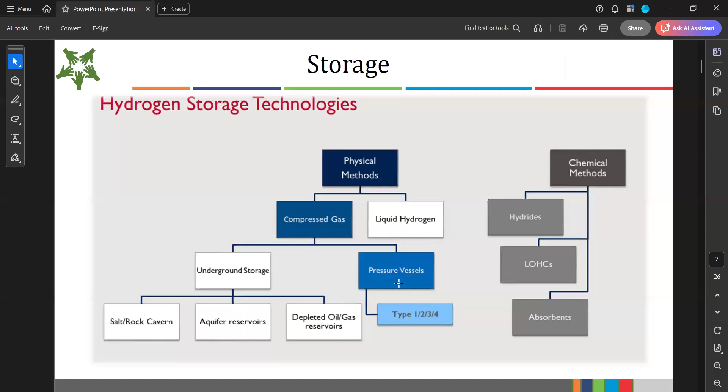Now we get into the verticals of hydrogen and its storage. Before talking about production, we need to talk about how hydrogen storage plays a very important role and what the physical challenges are. You can see a wide classification of methods that we can have. Presently, hydrogen is stored in pressure vessels, type 1, 2, 3 and 4. There are four types of pressure vessels where we can have the hydrogen compressed.

Basically, hydrogen has a low volumetric energy density and is the lightest of all the elements, so it's very difficult to store in a compartment. It's lighter than helium and easily lost into the atmosphere. That's one bigger challenge. Also its boiling point is low, minus 252 degrees Celsius, so it has to be kept at a very low temperature, the cryogenic way. Storing hydrogen as a gas requires high pressure tanks, basically 350 to 700 bar pressure.

And why is storage of hydrogen critical? Because with hydrogen there are a lot of applications you can utilize in the upcoming days by incorporating it with a fuel cell, and the usage of hydrogen in various technologies. It is going to make the process much more clean and green, with less pollution, and more efficient. Hydrogen cooling is already in place and works very efficiently. And leak detection in hydrogen systems is another challenge, which is why hydrogen technology is still far from what we think. So let's get into more detail.

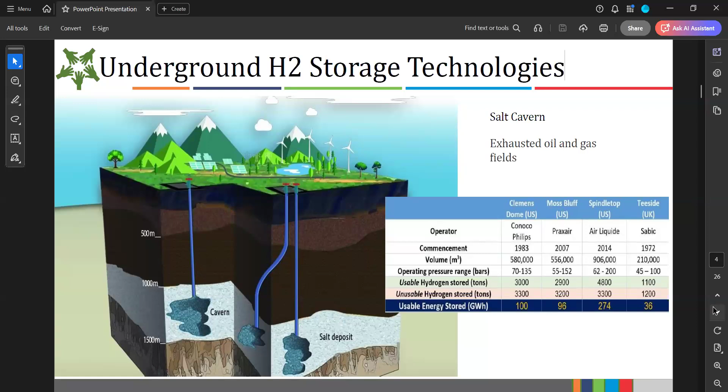As I told, there are four types of hydrogen storage: type 1, type 2, type 3 and type 4. If you see the pressures of hydrogen storage in detail, type 1 is 200 bar, type 2 is 300 bar, then type 3 and type 4. A type 4 tank can have up to 1000 bar pressure. There are different lining materials inside.

I'm getting cross noise from participants, kindly mute your mic, please. Sorry for the disturbance, sir.

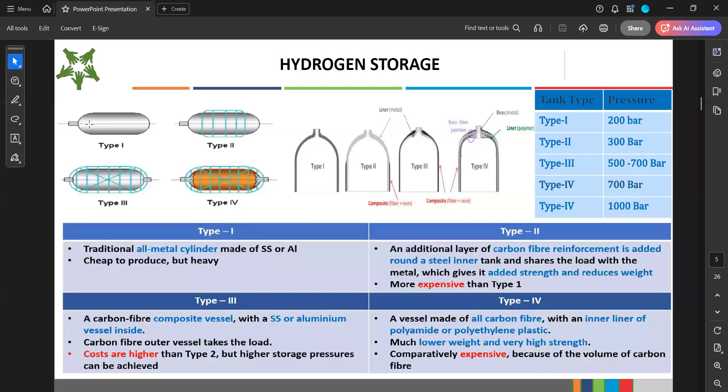No problem. The type 4 vessel can have high pressure hydrogen storage, and it's made of carbon fiber with an inner liner of polyamide and polyethylene plastic. It's lightweight with very high strength, but it's expensive. Let's get into more detail about the Type 4 vessel. This is the setup of a Type 4 vessel using carbon fiber composite: there is dome protection, a valve, an inner liner, and a temperature sensor inside.

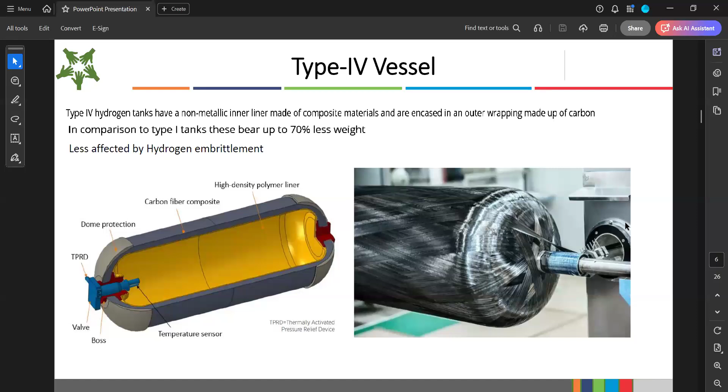The point is, unless the hydrogen storage technology is fully developed and implemented, this technology is very challenging, risky and complicated to deal with. That's why hydrogen storage plays an important role when we talk about green hydrogen technology and its usage. These are different types of cylinder testing processes involved in hydrogen storage. Anyway, the presentation will be shared, so you get to know all about it.

It includes what type of resin material and plastic liners are used, then the hydrostatic burst pressure test, ambient pressure test, leak test, bonfire test, penetration test, chemical exposure test, damage test, then torque test. All the tests are done before it gets deployed.

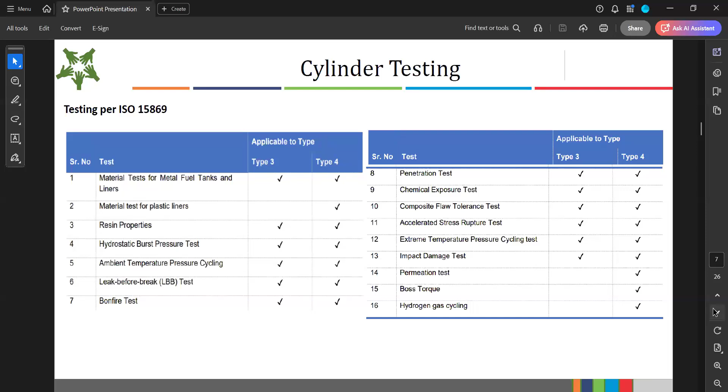Transportation of hydrogen is a very critical point, because usually petrol, diesel and crude can be easily transferred from one point to another with heavy containers. Petrol, of course, will evaporate easily, but it's not that complicated in terms of safety. Diesel is not much to worry about, as well as crude.

But hydrogen transportation is looked upon very keenly, because there are two stages: one is physical storage, and the other is chemical storage. In physical storage, it gets compressed and stored. In chemical storage, it is transformed into different forms and stored.

So the mode of transportation: it can be taken in trucks, rails, pipelines, and shipping, and the travel distance is also defined, so you cannot go more than that. If you want to go for a larger distance, then only you can go for shipping, because making the hydrogen travel by ship involves much more complexity, since the ship will have a lot of shakes in the journey and that makes a higher possibility of hydrogen getting leaked.

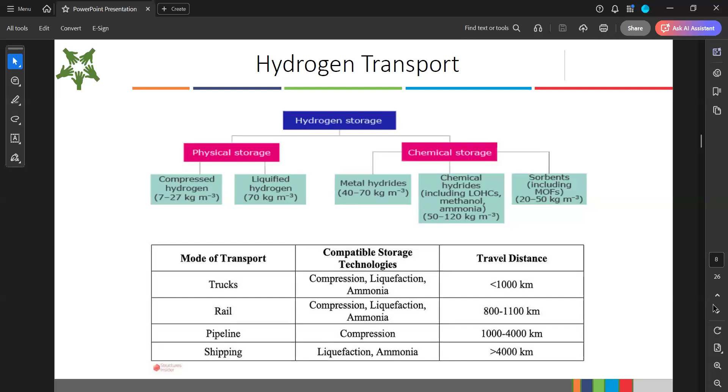So basically the hydrogen was transported from Australia to Japan. The moment the container reached Japan, when they opened it, there was nothing inside because all the hydrogen got leaked. It's very difficult to store hydrogen, so those kinds of serious issues are there in terms of storing it. And it's given here how the hydrogen can be stored and what kind of energy density we can have, with respect to compressed, liquid, and other forms like metal hydrides and sorbents.

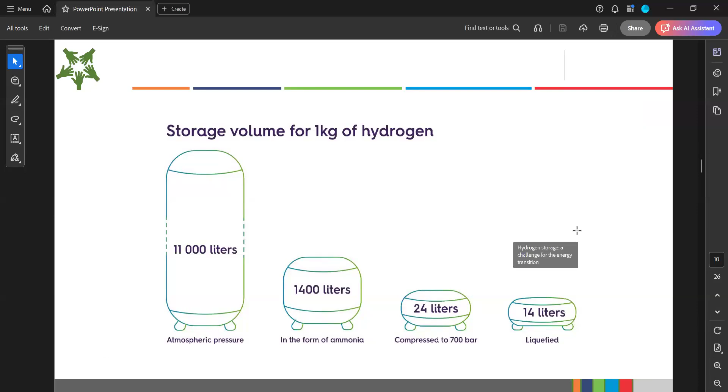So this is the storage volume of hydrogen in terms of the tanks: 11,000 liters, 1,400 liters, 24 liters, 14 liters. So 14 liters is the liquefied form. Shipping of hydrogen from one point to another involves a lot of logistics and transportation. Liquid hydrogen or ammonia is normally transported in ships due to their high energy density, with high cost due to the conversion charges.

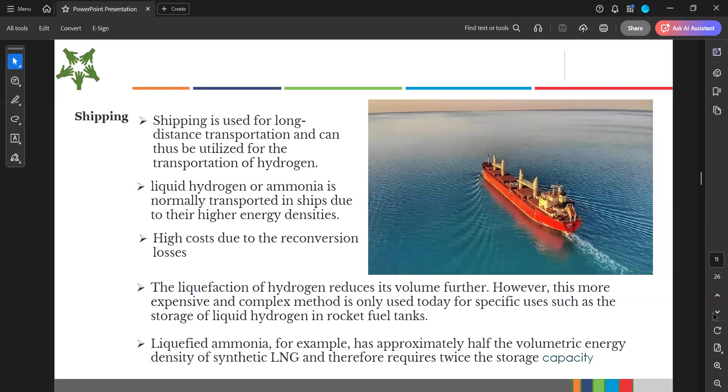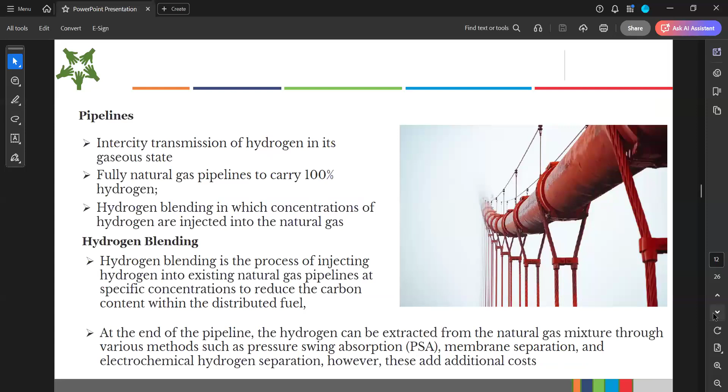Because once you change the form from one to another, you have to convert it back to hydrogen again. So ultimately it is all going to increase the cost. Transportation of hydrogen through pipelines is another way, and blending hydrogen into natural gas pipelines is another way. Ultimately, everything involves a process, so look at how much electricity it is going to consume. Now we're coming to the main subject, the components of the system involved.

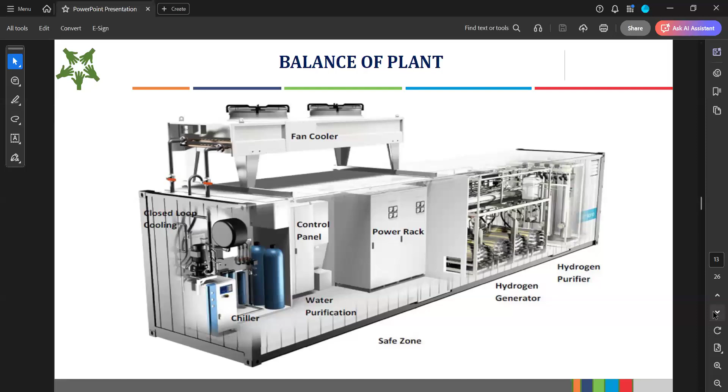So this is the closed loop cooling plant and control panel, water purification, fan cooler, power rack, safe zone. This is the hydrogen generator and this is the hydrogen purifier. So this is the total system involved. This is a generic schematic and balance of plant for PEM. This is the transformer where the supply comes in and it gets converted into DC through a rectifier. So this is the input supply for the electrolyzer.

So basically the input, the fuel for this whole process, is water. Water is fed into the electrolyzer, and the supply is given to the electrolyzer through the rectifier because DC power is required for the electrolyzer to work. The electrolyzer separates H2O, water, into two separate components: one is hydrogen, H2, the other is O2. So you can see here, oxygen is separated and hydrogen is separated.

Oxygen is taken out through the vented oxygen point, whereas hydrogen is sent to two chambers to separate the water from the gas and dry it, so that it will be dry hydrogen. After that it is sent to the buffer tank, compressed further in a high pressure compressor, and finally it comes to the storage tank where it is stored. The water is collected in the electrolyte tank as the byproduct of this whole process. So this is the total schematic layout of the hydrogen production process.

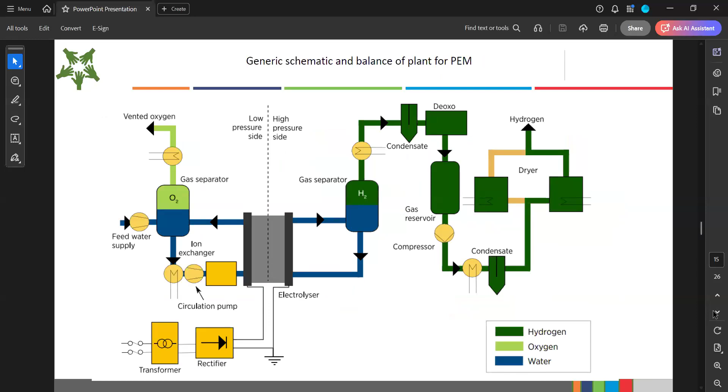Right. So the hydrogen generation stages can be classified. First, the transformer rectifier unit. This is the electrical unit which is mainly there in front of the electrolyzer, because this converts the existing alternating current into DC. Okay. So DC power is required, and the DC power will power the electrolyzer.

Okay. So basically the anode and cathode of the electrolyzer are connected with the positive and negative terminals of the rectifier output. Whereas the electrolyte system will consist of two gas separators and an electrolyte recirculation system, and it is cooled and recycled into the stack. So the main function is to feed the water tank, cool down the H2, and remove the residual electrolyte traces. So these are the pre-hydrogen generation stages.

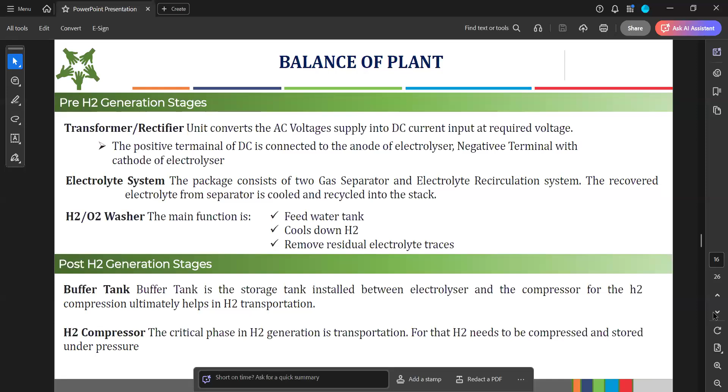The post-hydrogen generation stage is the buffer tank, where you collect the hydrogen, get it dried, compress it and make it ready for transportation. Okay, so that's the H2 compressor, where it will compress and store it in category 1, 2, 3, 4 tanks based on the nature of transportation. And once it is stored, then it is taken for further level of transportation.

And there are other components like the deoxidizer. So that is to remove the other suspended molecules in it. Then the hydrogen dryer unit to remove the water vapor and moisture in the hydrogen gas, and storage of hydrogen.

And there is another unit called the water purification unit, where the pure water which is coming out as the byproduct will be taken out, and we have to remove the contamination of the recycled water to protect the electrolyzer stack, because through the process it will go through different pipes and come out. So there might be some microparticles of ion, metal, and other things. So that has to be removed effectively.

Otherwise, the problem is the electrolyzers have a membrane. Okay, so the membrane is something which separates. So the membrane is very sensitive, and that's the heart of the system. Like how our heart has auricles and ventricles. Similarly, here the main unit which works for the whole system is the electrolyzer membrane. So the main purpose of filtering and purifying the water is to increase the longevity of the electrolyzer.

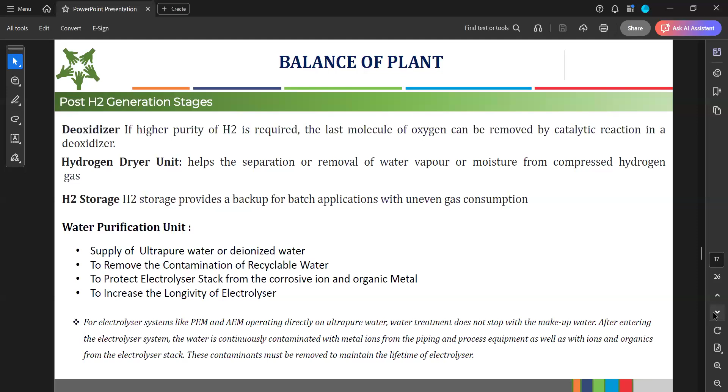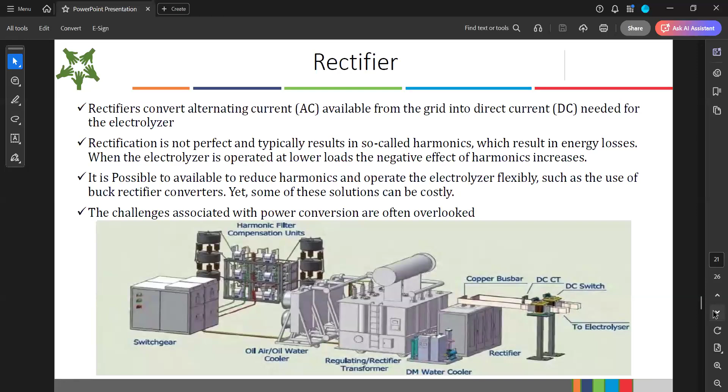Here you can see the switchgear, and there will be a harmonic filter and compensation units to reduce harmonics and make the system harmonic free. The total harmonic distortion should not be more than 1% for the total system, making sure the power factor is maintained at unity and harmonics are completely eliminated.

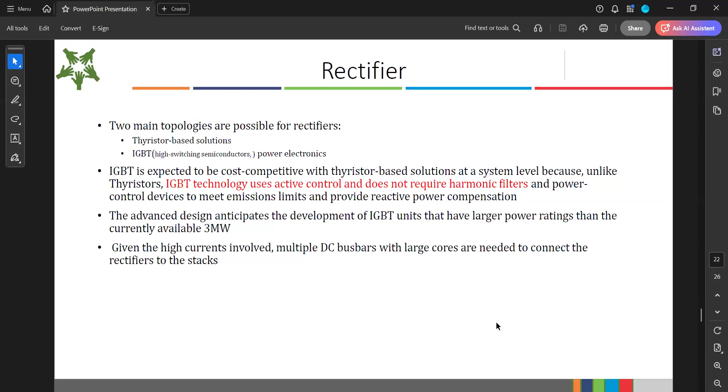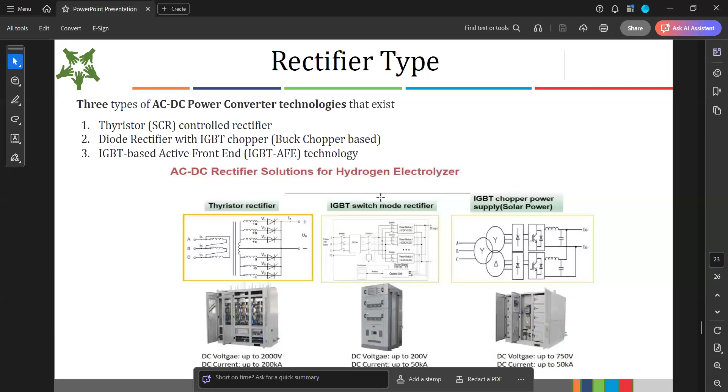These are the different types of rectifiers used in the process of hydrogen production: thyristor rectifier, IGBT, and chopper power rectifier.

Now I want to take you to the real subject of how solar is going to be implemented and how it's going to be beneficial for you—the hydrogen energy system. We see hydrogen can be used; I'm coming to the point of application of hydrogen, and now we shift to how to integrate solar into hydrogen. Before that, think about the necessity of generating hydrogen, because it has multiple advantages and applications.

These range from transportation, creation of synthetic fuels, fertilizers, metal production processes, and power generation.

So many ways, including power generation by integrating with solar, it works very efficiently. I'm sure we all know about a few technologies like Bloom box and hydrogen fuel cells at the advanced level, where I read an article where a 100-watt solar panel with a small fuel cell can generate power for a typical 2 BHK house for 10 years.

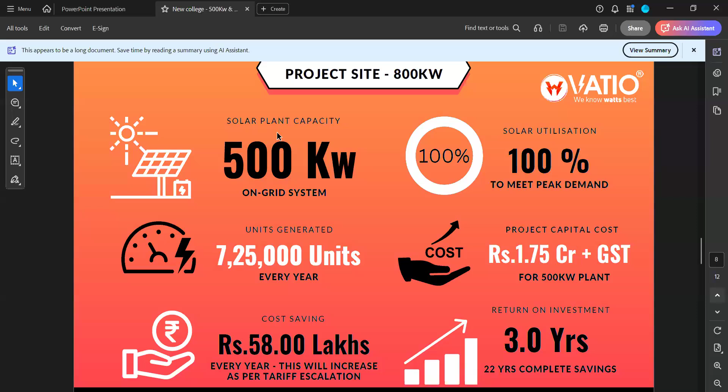So I hope you can see the screen. Yes sir, it's visible, sir.

So this is the simple nutshell of a 500 kilowatt on-grid system. In case the production site requires a system of 500 kilowatt to be powered by solar, then it's going to cost an additional 1.75 crore in capital cost.

But if you see the math down the line, the return on investment is just 3 years, which works out to around 30 to 33% rate of return year on year, which you can never witness in any other form of investment. So the ideology of bringing solar into green hydrogen production is a very fundamental need of the hour.

Not just to claim it is green, it's also to make it much more cost effective, because the moment you bring solar into the system, the first 3 years is going to be your expenditure. From the fourth year onwards, the cost of production is going to come down because the cost of electricity year on year is going to be saved.

Every year, 58 lakhs is going to be the savings, and translating the amount of energy produced in 1 year of time, if you subtract that amount, it's going to bring down the cost of hydrogen production significantly.

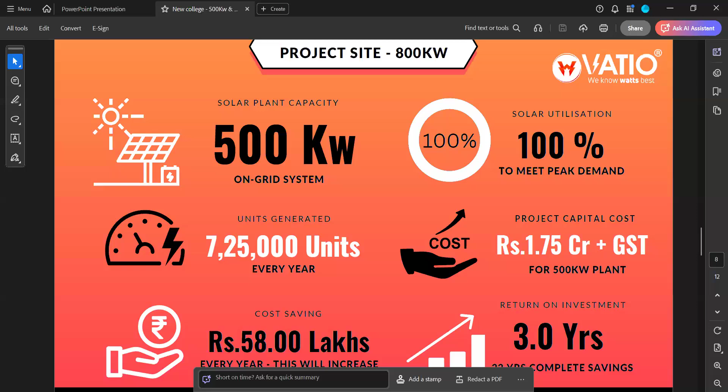So before that, in detail about how solar can be adopted, we need to look at what type of system is involved, how much energy it can perform, and what kind of environmental benefits it will help with. So let us go into that.

Sir, your screen is not visible, sir. Rajaganesan, sir.

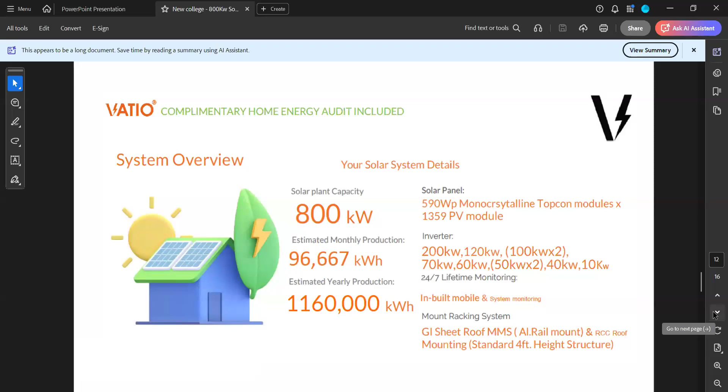So in case if you are planning to put an 800 kilowatt system for green hydrogen production, what are the kind of environmental benefits we can see here? Installing an 800 kilowatt system is literally equal to planting 16,000 trees per year, and also about 20.8 lakh liters of water is saved every year.

Also 5.2 lakh kilograms of carbon emissions is prevented every year. Approximately 522 tons of carbon emission has been saved, and approximately 580 tons of coal is being saved every year, and also 130 kiloliters of gasoline is also saved. So ultimately that's why we are referring to generating power through solar as green power, because of this kind of environmental impact.

Because if you go with the thermal power plant, you need coal, lignite, and that's a byproduct extracted from under the ground. That's nothing but fossil fuel. Once upon a time there were trees that went into the earth and became coal, further converted into lignite. That's the whole story we all know.

But the point is, the more we deplete the resources, the more the resources will get in deficit. And if you see in Neyveli, we have a lot of mines. We took a lot of lignite, and after it's all closed, even if you do the plantation, how long is it going to take for that particular area to get regenerated? That's a big question.

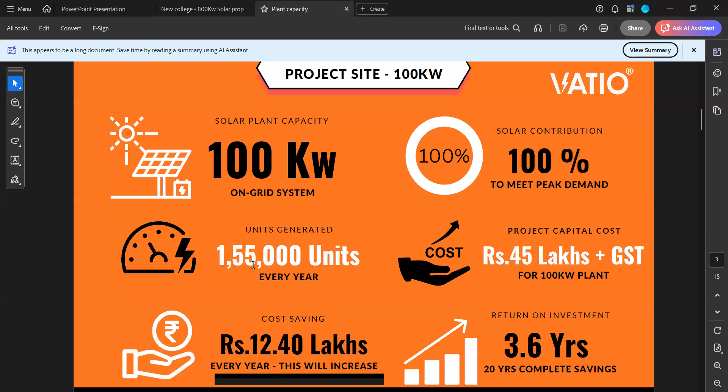So let us take a 100 kilowatt system as a case study for your quick understanding. 100 kilowatt will generate approximately 1,55,000 electricity units every year, and the cost savings is going to be approximately 12.4 lakh rupees. Whatever power is generated during the daytime, we can utilize that 100%. And the lifetime of the plant is operated for 20 to 25 years.

Now let us dive much more into the technical aspects of a 100 kilowatt system. Usually for solar power plant, what we put is an on-grid system for this kind of application. Either it can be a captive plant - captive plant is something which is put on the premises itself, so whatever power is generated on the rooftop will be utilized on the building itself for the factory or industry, consumed during the daytime itself.

In case if their consumption is less, then the surplus energy has a possibility of getting exported into the grid. That is called feed-in. So there are two or three different methods available in India per se - one is net metering, other is net feed-in, third is gross metering.

Net metering is adjustment of units by units, for residential systems it is there. So if you export 10 units in the day, you can adjust the same 10 units at night time for your AC consumption. But that's not possible in an industry or commercial establishment, where they are forced to adjust only during the time of the day. That's what we call TOD.

So whatever power is produced during the daytime, at the same time that power needs to be consumed. So the plant has to be designed in such a way that whatever power is produced from the solar should be utilized optimally, on the maximum, during the daytime itself during the load time. So understanding the load scenario is very, very important. That's why when we go for the installation of solar for any factory, industry, or process industries, understanding the load curve is very, very important.

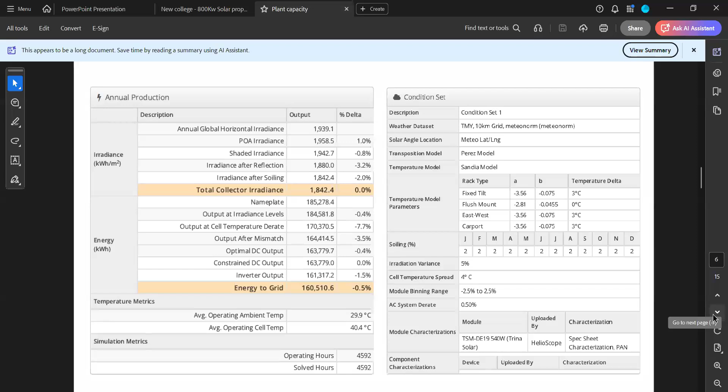So ultimately, in spite of the reduction of panel performance over the years, the cost of electricity is also going to increase year on year. In Tamil Nadu, the electricity prices are increasing by 4 to 7%, whereas the efficiency drop is only 1%. Still, you save 5% of the electricity hike year on year if you go with solar. If somebody installs solar today, he is going to effectively get his return in 3 years. Subsequently, the electricity price is also going to go up, which makes his return much faster than what has been predicted.

So, how can the evaluation of a site be done? Basically, for the rooftops we plan, we first have to do rooftop solar array feasibility studies, because we need to know where the shadows will come, how much they will impact, and all the factors we need to analyze. That's why the analysis of the array and its shadow impacts needs to be done. We can also mention where the inverter will be placed and how far it's going to be.

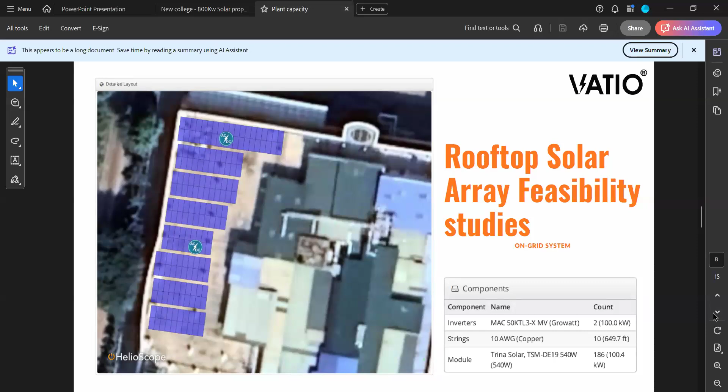And the solar panel shadow simulation study is also important, because the sun is not at the same place throughout the year. It is going to shift for different seasons, various climatic conditions, and also for different times. From morning to evening, the sun travels from east to west, whereas for different climate conditions, the sun moves from north to south.

Just the objects or disturbances which are on the left side or right side, which means east side or west side of your panel, will have a higher possibility of creating shadow. Whereas the objects which are on the south side of your panel installation area will have higher possibilities of creating shadows during the winter seasons. So you can't wait for 365 days to analyze how the shadow behaves in that area. So that's where the simulation studies play an important role.

So by choosing the location, automatically the latitude and longitude of the particular location will be fetched, and accordingly the sun path will be taken for reference, and that sun path will clearly tell you where the sun will be at a particular time, particular day, particular month. Okay, so based on that we are able to estimate where exactly the shadow will fall.

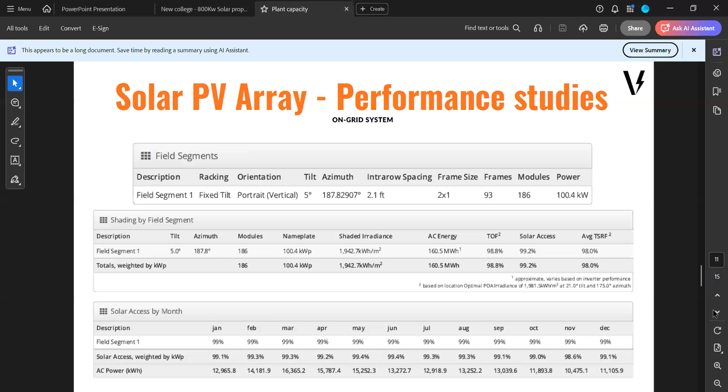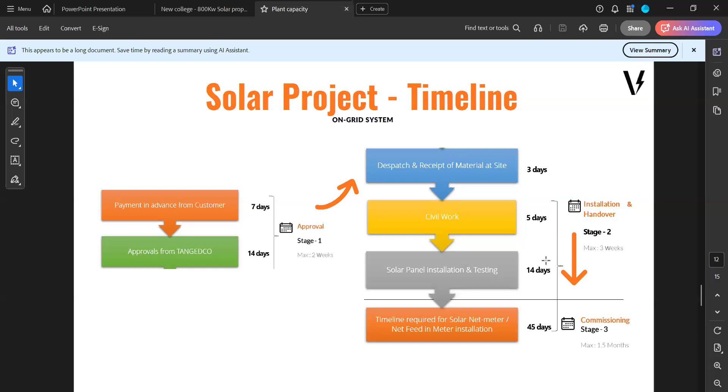So the project timeline will vary according to the project, right? From the customer approval, then getting the approvals from TANGEDCO or whatever the discoms, then material dispatch, civil works, panel installation, then getting the approvals for the meter, net feeding mechanism, and all the other factors.

So now I just want to throw a quick question: you are all from the academic background, so how many of your institutions have solar installed at your campus?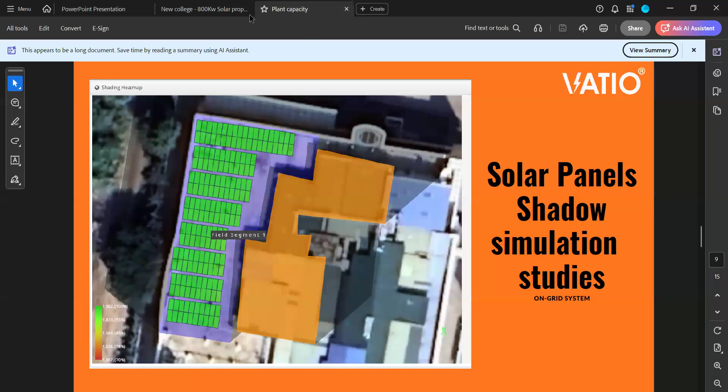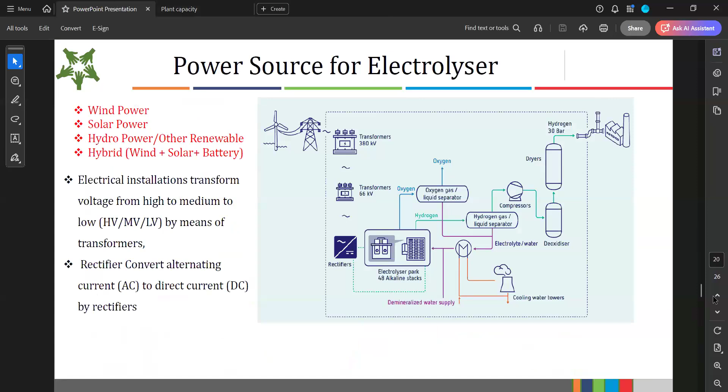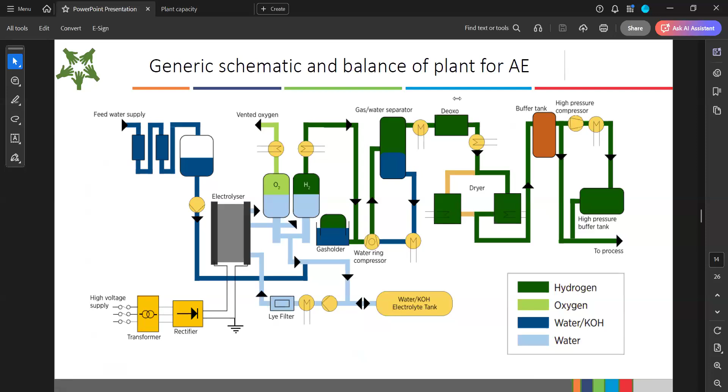So now there'll be a question of where this solar, whatever we are discussing, will be connected. So basically, the solar will be connected here. I'll show you. So this is your main transformer and this is your rectifier. So basically, it is going to be connected in between. So let me put up a whiteboard to make you understand very clearly.

Can you able to see the white screen? Yes, sir. Yes, sir. It is visible, sir.

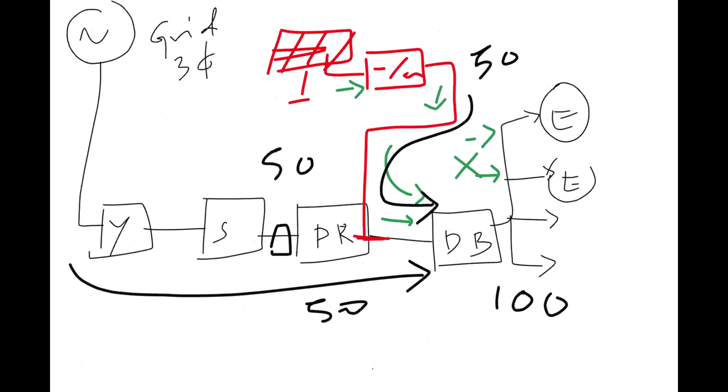So in case our day demand is more, then definitely it's not only for integrating renewables into green hydrogen production. It is for each and everybody, irrespective. It can be a college, it can be an office or factory. Whoever is operating during the daytime, it is better to put solar, no doubt about it. So, any doubts in this methodology of how the system works?

No, sir. Yeah, so I got a question in the chat from Dr. A.S. Vinci. So I would like to answer this question.

Is it a good idea to install solar for home usage, as the power usage is minimum during daytime? That's why I clearly told for residential consumers, you have the possibility of net metering. So I'll explain the concept of net metering. You have a solar rooftop, it comes to the inverter, and this is your grid, this is your energy meter, and this is a distribution point, and it is coming to your load house. Okay.

Now, how net meter works is, if during the day 10 units are produced, but you have only consumption of 3 units at home because you went to the office, the surplus of 7 units will get exported to the grid. So this meter has an export credit of 7. You come in the evening, 6 or 7 o'clock, the solar is not working, and you switch on two ACs, consuming 7 units for the next 5 hours.

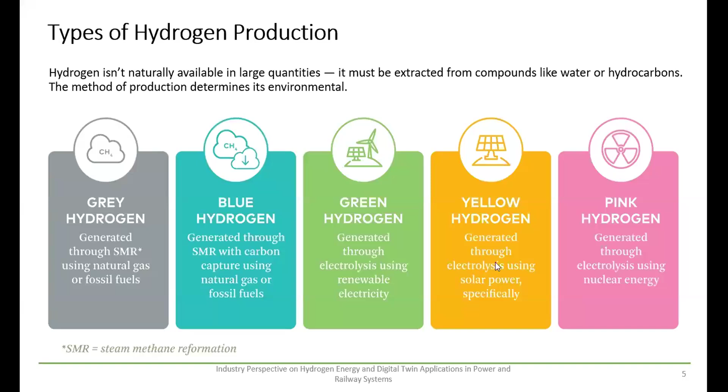And from the power sector side, or the electrical engineering point of view, we could see the electrolyzer as a large controllable DC load when connected with the power grid. The electrolyzer also acts as an interface between electricity and hydrogen.

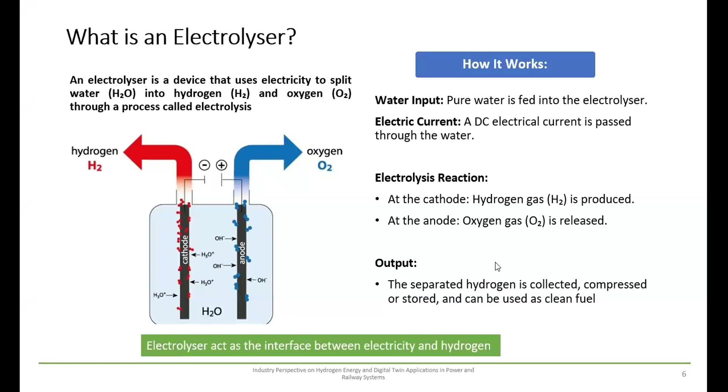power grids. And the solid oxide electrolyzer is high temperature electrolysis. Solid ceramic materials are used in this electrolyzer. It has very high efficiency, usual in industrial settings, but it is still under development. For the power sector and the railways, the PEM electrolyzer was the most suitable type.

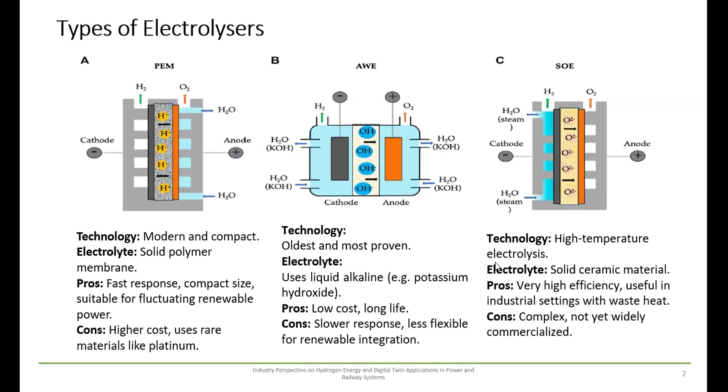Hydrogen storage and transportation. This explains how hydrogen is stored and transported, which is critical for practical hydrogen deployment. On the left, there is a flow diagram. Hydrogen storage is classified into physical based and material based. Physical based is compressed gas, cold compressed, and liquid hydrogen, which are commercially available but energy intensive. It also shows material based storage like metal hydrides and chemical carriers, which offer higher safety and density but are still emerging.

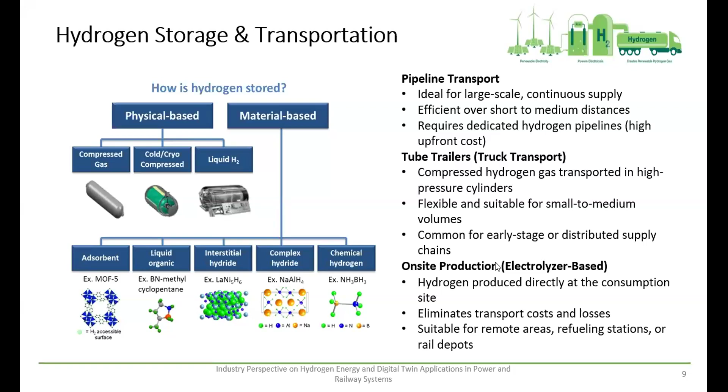Apart from transportation, hydrogen can also be produced on site, electrolyzer based. Hydrogen is produced directly at the consumption sites, so it eliminates transportation cost and losses, and it doesn't require any centralized hydrogen production.

As I told you before, the electrolyzer is a large DC controllable load. The electrolyzer is not just a hydrogen producer, but a smart and controllable electrical load. It plays a crucial role in grid stability.

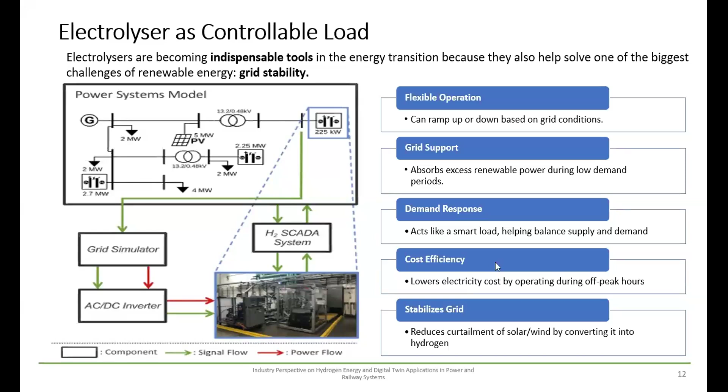From the power sector view, the PEM electrolyzer provides a sub-second response - fast response time and high efficiency at partial loads. It's compact and modular, easy to scale and deploy near renewable plants or in urban spaces. Its compatibility with power electronics and SCADA enables demand response, frequency support, and peak shaving, strengthening grid stability.

If you have any doubt, you can stop me anytime. Okay, sure sir. Okay, thank you.

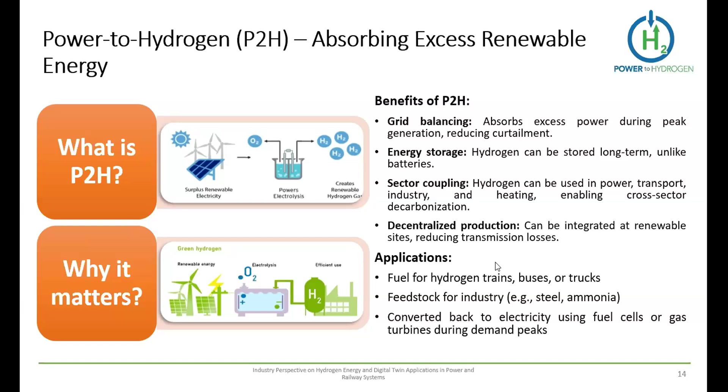Here it's hydrogen to power. As you can see in the diagram, from the electrical grid, the power goes through a dedicated transformer deployed for the electrolyzer, which steps down the voltage. There should also be a converter, though it's not included in the diagram - it converts from AC to DC and feeds the DC supply to the electrolyzer. From the electrolyzer, hydrogen is produced and stored.

From the stored hydrogen, it's used back as fuel, working as a fuel cell. From the fuel cell, we regenerate power from the hydrogen and supply it back to the grid.

A fuel cell produces electricity by combining hydrogen and oxygen - it generates power by splitting the hydrogen into protons and electrons. We normally call this hydrogen to power, H2P - it enables dispatchable generation, allowing hydrogen to act as a long duration energy storage.

It also forms a closed loop energy storage system, supporting high renewable penetration. It's a closed loop because we generate from the grid, and it goes back again to the grid - so it's a closed loop energy storage system.

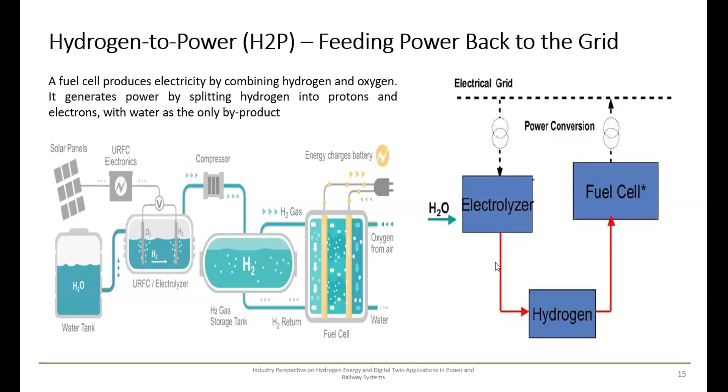The hydrogen storage, medium and long duration energy storage. Why hydrogen plays a crucial role in the medium and long duration energy storage, especially in the renewable rich power systems.

The renewable energy from wind and solar is converted into hydrogen and stored for later use in fuel cells, transportation, and industrial processes. In comparison, batteries are highly efficient for short-term energy and balancing fast responses, such as frequency regulations and ramping support.

Hydrogen, on the other hand, is better suited for large scale and long duration storage, enabling sector coupling between power, transport, and industries. This makes it particularly valuable for seasonal storage and backup power applications, including the round trip energy losses, as I told you before.

In the infrastructure and safety requirements, such as high pressure tanks and pipelines, it's a high capex. As you can see, there are a lot of complexities and challenges for storing and transporting hydrogen, compressed hydrogen.

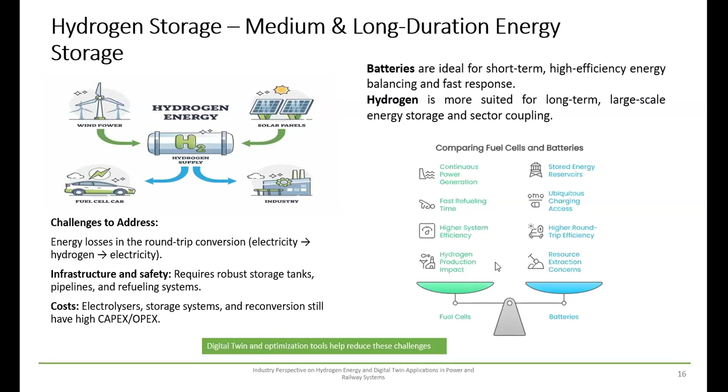And hybrid hydrogen and battery systems. As of now, we have discussed the battery and hydrogen alone systems. Now, hydrogen plus battery, we call it hybrid hydrogen.

This is important for modern power and transport applications. Batteries are highly effective for short-term fluctuations, operating from seconds to minutes, while hydrogen systems cover longer durations, from hours to days, especially during renewable energy shortfalls. Combining both improves grid stability, reliability, and asset utilization across multiple time scales.

Why hybrid? Batteries handle the short-term fluctuations, while hydrogen covers the longer duration. In practical use, batteries manage the fast power variations while hydrogen stores the excess energy for later use. This approach is very ideal for renewable energy smoothing of grid systems.

The benefits of the hybrid hydrogen and battery system all focus on grid stability. Grid stability is a very important topic in this power sector, so that's why we always talk about grid stability - improved grid stability and energy reliability, and better asset utilization across different time scales.

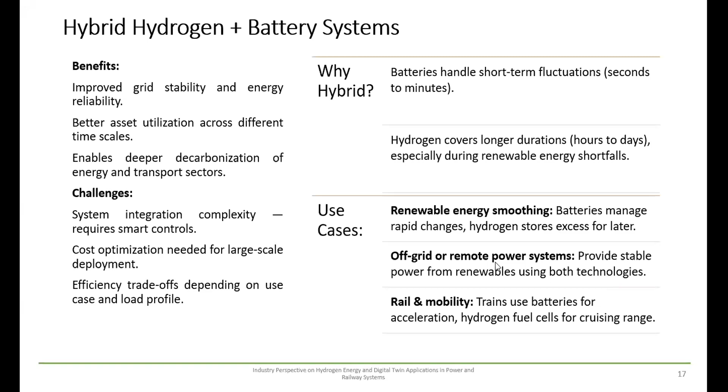During regenerative braking or surplus renewable generation - what is regenerative braking energy? The regenerative braking norm we used to call it in the railway systems. Regenerative braking is a big concept in railway systems.

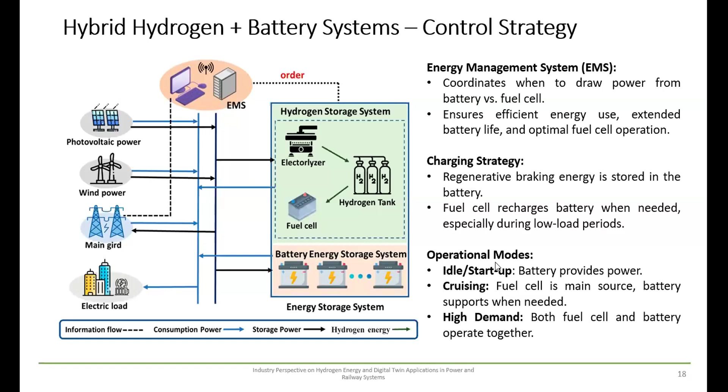Operationally, the system works in three modes for metro systems: idle or startup, where the battery supplies power to wake up the train and run it onto the track. When it starts cruising or in traction, the fuel cell is the main source and the battery supports when needed. High demand means both fuel cell and battery operate together. This is just a method of how the hybrid hydrogen and battery systems work on metro systems.

Let's come to hydrogen energy in the railway system - how hydrogen energy is being utilized in railway systems. Here's an example of a hydrogen train, showing the architecture and working principle of the hydrogen powered train, which I'll explain now.

The hydrogen storage cylinders are safely mounted on the train roof. The parts include hydrogen storage cylinders, cooling fans, compressor, and the battery or supercapacitor - normally we call it a supercapacitor. There are motor blowers and the three-phase AC motor on the bogie sides. On the power side, we have the DC link, main inverters, three-phase AC motors, and the auxiliary inverters.

The hydrogen storage cylinders are safely mounted on the train roof. Hydrogen from these tanks is supplied to the PEM fuel cell stack, where it is converted into electricity, producing only water as a byproduct. The electrical output from the fuel cell is regulated through the DC link and power electronic converters, normally called high-speed circuit breakers (HSCBs) - very high-speed operated circuit breakers. This includes the complete power module, including the inverters and rectifiers.

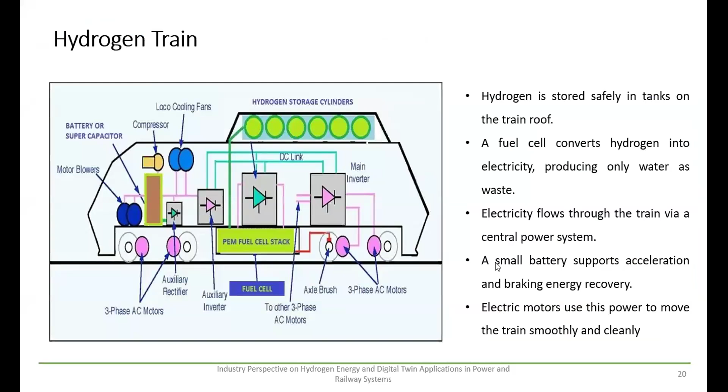And there are no emissions, it's zero emissions, only clean water vapor. There is no CO2, no NOx and no particulate pollution.

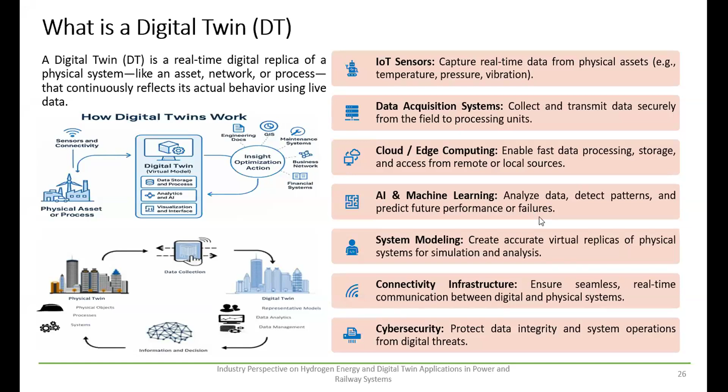As you know, for the types of digital representations, we have the digital model, digital shadow, and the digital twin. The digital model is a static model. There is no real-time data exchange. The digital shadow is a unidirectional data flow, only one-way communication, automatically from the physical to the digital. And the digital twin is bidirectional. The digital may inform or trigger changes. With real-time data, it's a closed loop control in this technology.

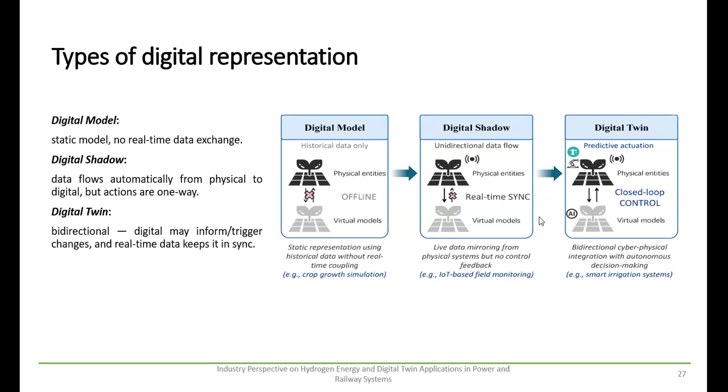Practically, digital twins allow real-time condition monitoring, early fault prediction to reduce downtime, and efficiency optimization of hydrogen production and usage. They also enable virtual simulations before construction, improving design and commissioning. Most importantly, digital twins ensure safe operations, monitoring critical parameters like leaks, pressures, and temperature issues, while enabling seamless integration of hydrogen systems with renewables and the power grid. These are the key challenges we can overcome with the digital twin platform. This makes hydrogen systems scalable and reliable.

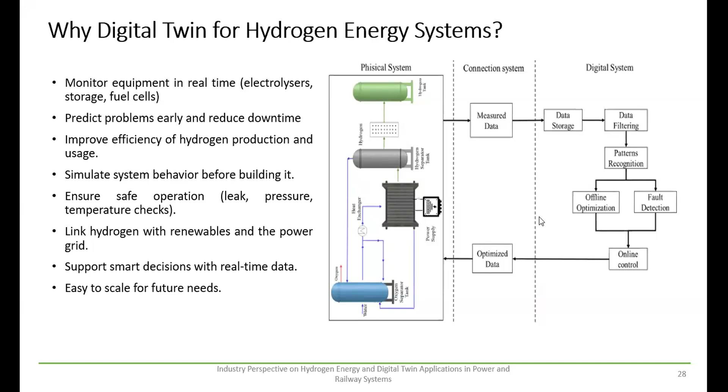Let's go to the architecture. How would the architecture be? There are a lot of layers for hydrogen energy systems. The physical layer, normally we call it the actual assets, where the electrolyzers, turbines, and the grid are all installed. We replicate the same systems in the physical layer. As I discussed before, the IoT sensors are fixed in the sensing and data acquisition layer. Then the data processing and analytics layer, where all the real-time data from the physical assets is processed.

The model and simulation layer has mechanism-based models, for example, power flow, dynamic stability, and electrochemical processes. Integration and interface layers: dashboards or user interfaces, control loops, possibly automated control and optimization actions. Life cycle modules: design, planning, operation and maintenance, real-time monitoring, predictive maintenance, or scenario analysis, such as expansion planning.

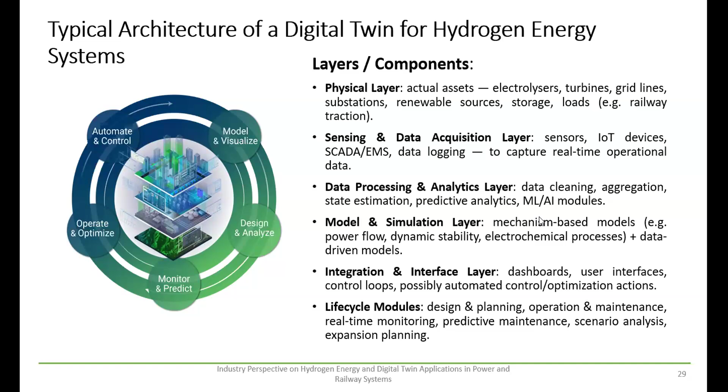Also, the need for the digital twin in TPSS. What is TPSS? It's traction power substation systems. The digital twin also helps to simulate train movement and its load. We can predict dynamic load variations as the train accelerates, cruises, and brakes, and when the train can generate regenerative energy. It also prevents substation failures. It simulates the stress on transformers, circuit breakers, and feeder lines for proactive maintenance. It can help predict voltage drops and feeder overloads, and identify weak points in the traction supply before actual failures.

In the railway sector, we have the power zone and the neutral zone to run the train. Where a power zone fails, that will be a weak point of the traction. We can predict and identify that by using the digital twin for TPSS. Optimize schedules and energy usage: analyze train timetables, regeneration, and load balancing to minimize energy consumption, and reduce downtime via predictive maintenance. Continuously monitor asset health to forecast failures and schedule maintenance.

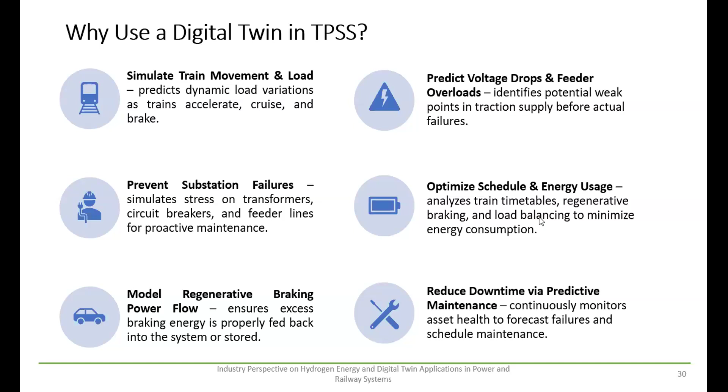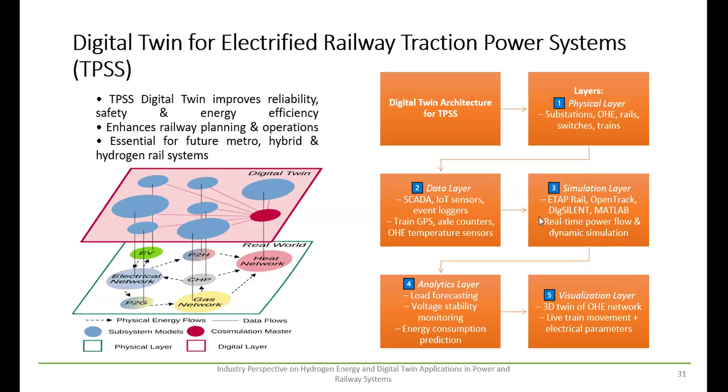The analytics layer covers load forecasting, voltage stability monitoring, and energy consumption prediction. Then visualization: we can visualize all the practical scenarios with this layer. So the TPSS digital twin improves reliability, safety, and energy efficiency.

I hope I basically covered hydrogen, how we integrated it in the power sector and the railway power systems. Because of the limited time, we couldn't explore grid stability, which is a big topic, and also train traction in the railway system. These are two major topics where I covered only very basic things here. In case of any doubt, you can ask me.

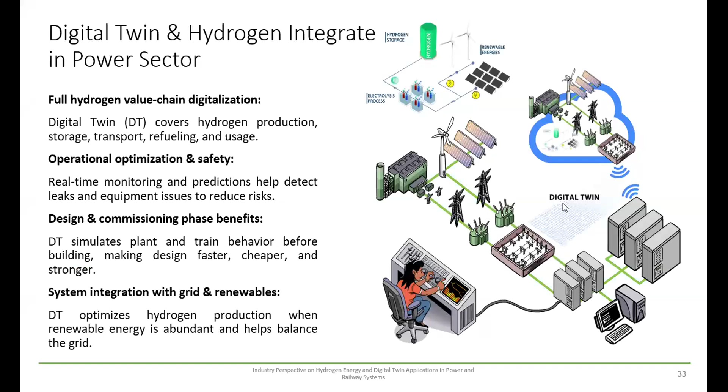Sir, excuse me, this may be a very basic question, don't mistake me. We have entered the electric vehicle era, and most users are switching to electric vehicles. Now the problem occurring is the disposal of batteries. How are we going to dispose of the batteries, because battery life is only 2 or 3 years, or at the maximum 4 years, right?

We have to change them every 3 years. Now you're saying electric trains will be powered with hydrogen. There also we need battery storage. In the previous session, Rajaganesan sir also said they'll be either grid connected or standalone. That's why I asked earlier whether you are explaining standalone or grid connected systems. For either, we are going to employ batteries, right? Battery disposal is already a problem. Then how are we going to solve the hydrogen storage and battery problem together if we go for green hydrogen vehicles, sir?

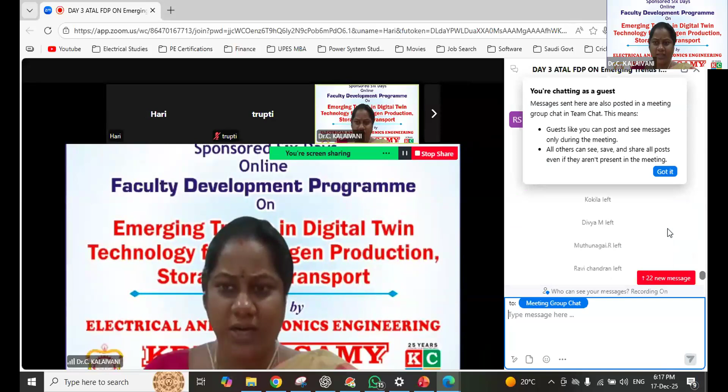Thank you, sir. There's a question from participant Rana Singh. Which kind of sensor is used? Is this system doing edge or fog computing? How did you integrate the DT platform into it? Time series integration issues, practical integration challenges you faced, data accuracy level. Can it be audit-level accuracy?

Where is it, ma'am? It is located in the chat box. Yes, sir, it is posted in the chat. Okay. How can I open the chat box? Let me check. Ma'am, come again, please. Can you please read it out?

Which kind of sensor is used? Is the system doing edge or fog computing? How did you integrate the DT platform? This question is related to time series integration issues, practical integration challenges you faced, data accuracy level. Can it be audit-level accuracy?